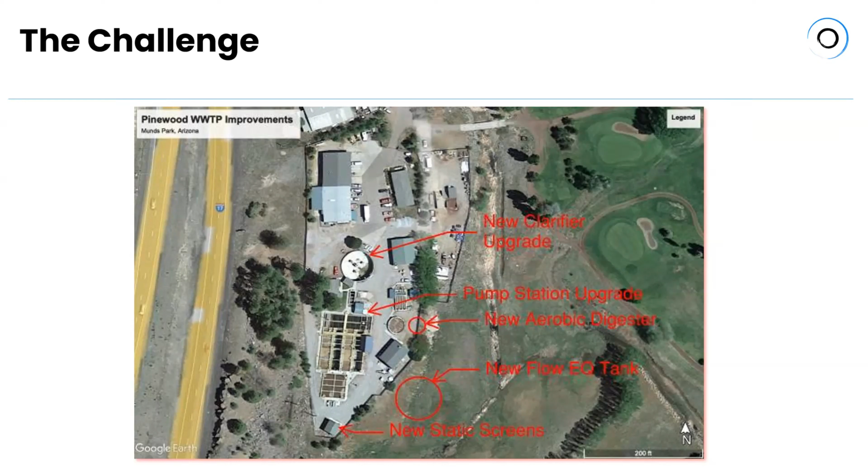So this is basically what I just told you. I talked about the I&I issues and the NPDES permit violation. Since we had an existing plant and it's already permitted for 600,000, we took that information and we put it into the Transcend software. And we also ran process runs for the existing 250,000 gallons a day average daily flow and we ran a process calculation for the 1.2 million gallons of the I&I flow.

And it was quickly determined that none of the process units in the plant were able to handle the high I&I flow value. We were able to confirm the sizing of the 600,000 gallon a day process for the aeration basins and the clarifiers. And that's when we saw the indication on the aerobic digester, and so that was a driver for upsizing that. So the Transcend software indicated a problem in some of the original plant construction. We needed to resize that, but all the other things that were in the plant were sized: bioselector, clarifier.

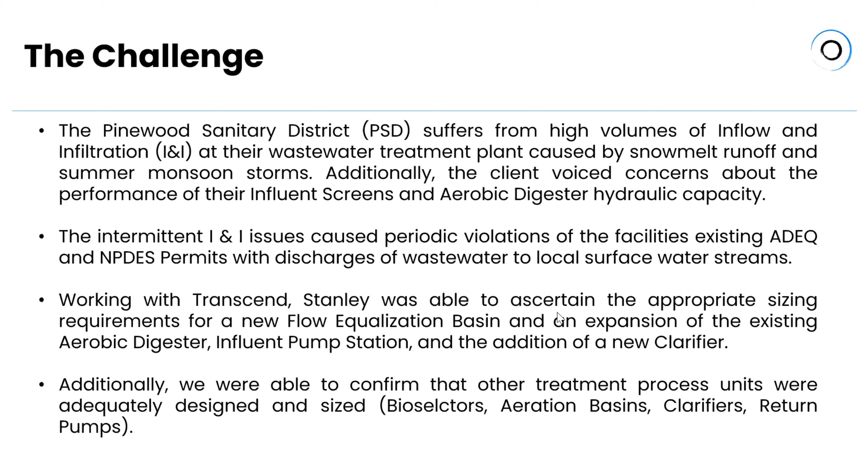So here I talked about the 3 runs. We did the 250,000 gallons a day, the 600,000 gallon a day current permitted plant capacity, and the 1.2 million gallons a day high I&I. We have to meet the current capacity to stay within state regulatory requirements. And because the plant can't handle the 1.2 million gallons a day, we have violations. And this particular plant has had so many violations that they're actually in consent order with the state.

And the consent order says you must stop the high flow, must get back within permitted plant capacity and take care of this. And that's why we've been actively involved with the state. We've showed them the process calculations we've generated from Transcend. We've talked about our option of the flow equalization basin, and certain regulators say, well, the problem's not at the plant, the problem's in the collection system.

Well, we recognize that, but the collection system problems are going to take 5 to 10 years to correct. And the treatment plant issue we could take care of in about a year or maybe 2 years. Obviously, we could build an above ground 1.2 million gallon flow equalization basin in less than a 1 year time frame, and that automatically stops the high I&I that slams the plant and causes these discharges.

So we're currently still working with the client to get some federal funding to help make all this happen. We're working closely with the state of Arizona to ensure that they're satisfied, and we're continuing an ongoing long-term master plan for the collection system. Ultimately, 5 years from now, all this should go away. The client will be back meeting regulatory and everything.

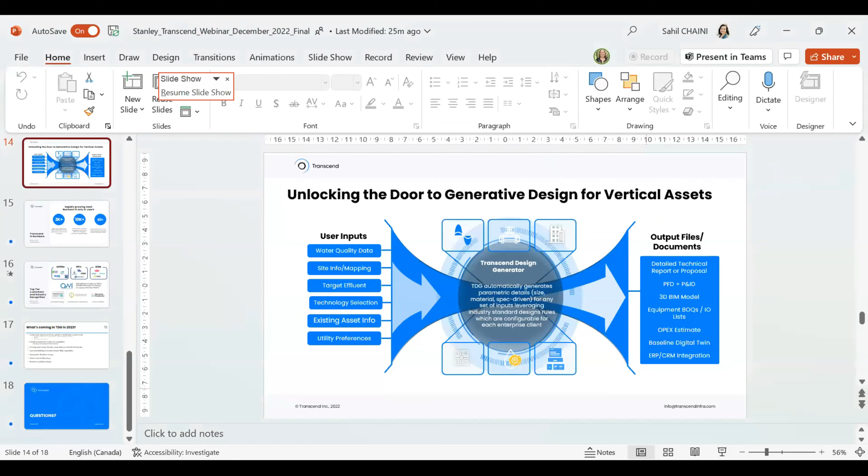So the question, Dave, is that it sounds like the conceptual designs at the plant and the design generator have contributed to a somewhat iterative approach to the I&I investigations in the collection system. Has the software helped you steer towards any other decisions or considerations in the collection system as well as the plant? Basically, what I think we get out of this is in identifying the plant problems, we're able to work with the client and see what the client can actually afford to repair. And so we were able to modify the master plan for the plant a little bit better to give them what they could afford.

The software really is more for wastewater treatment and not so much for the upstream collection system. But having the treatment plant information allowed us the opportunity to work with the regulators. Even though they're kind of bringing the hammer down hard on us with a consent order, saying you need to fix your collection system, and they keep reiterating that, we have to push back a little bit and say, yes, we recognize that, but that's a multi-year process and we can't get out of a consent order just like that unless we do the treatment.

And so by running the software, we're able to demonstrate that pretty clearly to the regulator, and they've kind of come around and they see where we're at. From all that, we took it back and we actually created a 5-year master plan and CIP for the entire system. I hope that helps answer your question.

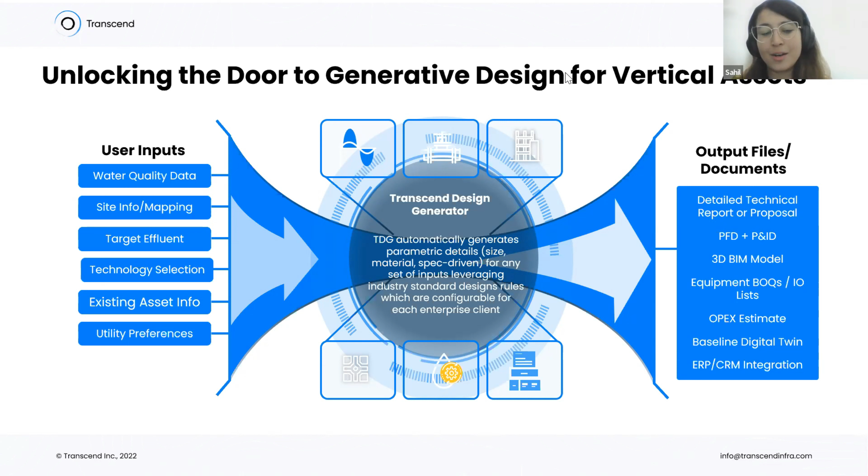I'm not sure how I can share my screen. If not, I can also bring up some examples, no problem. Yeah, why don't you bring up some examples? Give me a second. While you're doing that, I can talk about some of the other questions here.

Yeah, for sure. So I think Gina asked a question here about, can you set up limits parameters for the funding available cost design? I think Sahil maybe already answered that. You know, as well as I do, Gina, that clients have limited funds. So the way you would approach this, if you have an idea of what your client's funding is, go ahead and run the process calculations, determine all the treatment process units that need to be resized or upgraded, and then work with the client on the priority ones, the ones that they can actually perform with the funding that they have.

But the nice thing is the software actually will size everything, and you can see what your existing plant is capable of doing or not, and then you can focus on more specific individual processes. That's what I did with Pinewood. We knew the plant could do 600,000 a day. Oh, but the aerobic digester couldn't. And so that real fast became one of the elements that needed to be taken care of. So by running the software, you can get all existing problems.

Again, Gina, you asked a question, does Stanley typically use these for schematic level and then bring the rest of the design forward in-house, or does Transcend offer additional support after the initial design? Yes, the software and the output results we get initially are probably on a level of about 20 to 25%. That's real good if you're proposing on a wastewater treatment plant, put this kind of documentation in with your proposal. It shows that you've done your homework and you're able to present something to the client to hopefully capture the project.

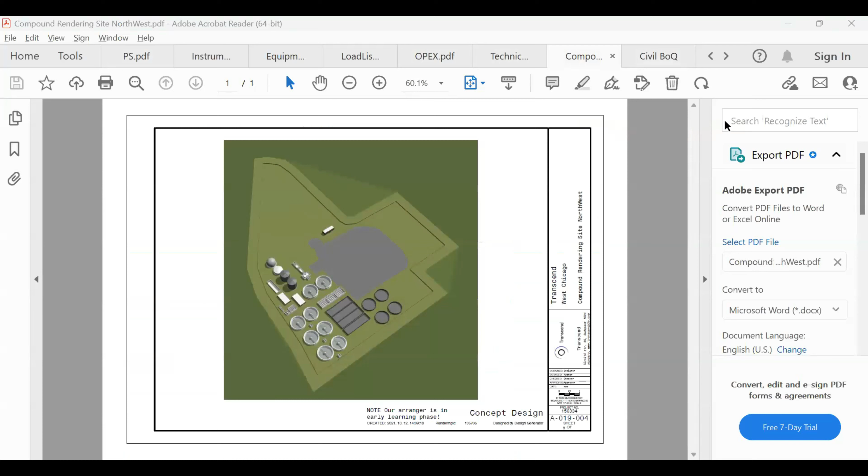So yeah, it initially does it at a schematic level, and then ultimately Transcend will refine the software to be more of a full-blown process software, but we actually go on and use some other spreadsheets to do final calculations. Do you have a rep for each project that you use to answer questions all through tech? I think that's going to be a question for Sahil.

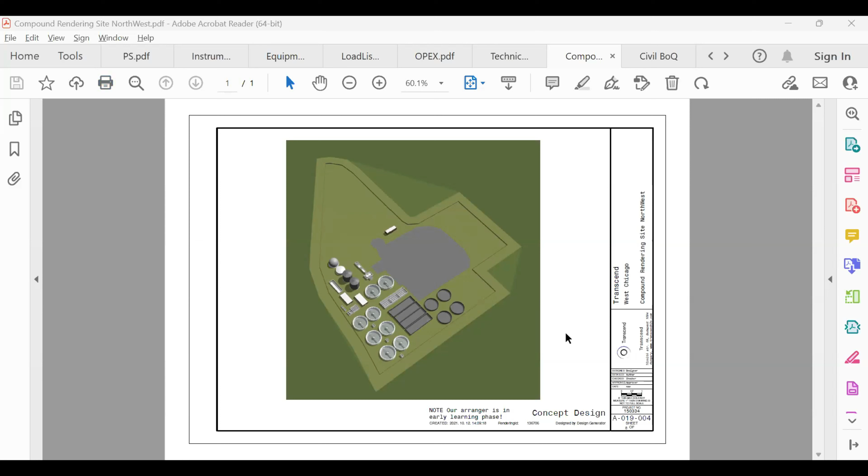How do regulators respond to the use of software in lieu of traditional design practices? In Arizona, most of the work that's done here is all run through different types of software like BioWin anyway. So they're pretty forward thinking here. Seeing output results and calculations and all the stuff we get in the Transcend data output, we don't have any trouble with regulators here. I don't know if other states are stringent. Again, that might be a question for Transcend. I think that's all the questions. Back up to Gina's first one about what a Transcend output looks like, and now it's going to go back to Sahil because you've got that up on the screen.

Absolutely. I'm showing a sample here that we ran in our demo instance. What you're seeing is a rendering. We do use Revit, which is an Autodesk product. You may have seen that we have a partnership with Autodesk. The way it works is, as you saw from Dave's drawing of the plant, new aerobic digester. What he did in Transcend was drew that site within Transcend using Google Maps exactly how you saw it. And you can essentially mark out, don't want anything to be built here, I want the biological area to be in this area. So this big gray area you see here is a no build zone. There's utilities or buildings there that the client didn't want to remove.

This is an MBBR facility. But I just want to show you'll be able to see everything in gray is the existing plant, and everything in white, or the lighter color, is new capacity that is required. So as Dave mentioned, you put in your input, the effluent quality and your influent flow, and then the software will say, this is what you have coming in, this is what you need coming out, here's the size of facility that you need. That's what Dave was talking about in terms of the sizing of all the different pieces of the plant, end to end.

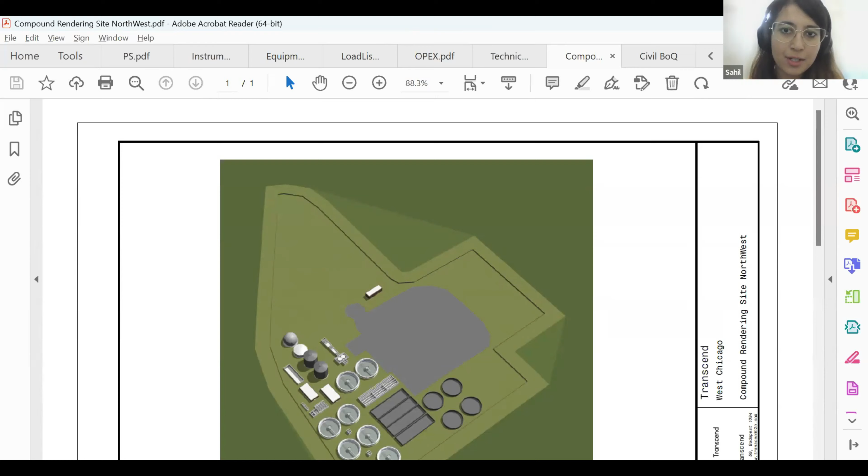And he also mentioned all the other types of documents. The process scheme, I know, is a big one for process engineers. So you'll actually see in here all the different portions of the process scheme and all the different parts of the facility. We have the equipment list, which gives you an idea of all the different equipment that's required for that facility, new equipment. So it'll tell you how much new equipment you need.

And then based on that equipment, we have a load list that'll be able to tell you the electrical load for, oh, sorry, that's going too fast, electrical load for that facility. We also have an OpEx document. So this gives you an idea of overall cost to operate the facility. So in terms of your costing, Gina, you have the numbers, and then you'd be able to say, okay, what is electricity cost in this specific area, and be able to do that analysis. So we do provide an overview of the chemicals, the polymers, and the waste for that plant as a whole.

The technical description is the key process document. So it really goes through the entire plant and describes every single part of the facility, and gives you all the process variables that you would need to put in your report. So for example, you would have a design basis, so all the influent and effluent characteristics that you would input. And then you would have here the coarse screens, fine screens, you would have the grit removal, primary clarifiers.

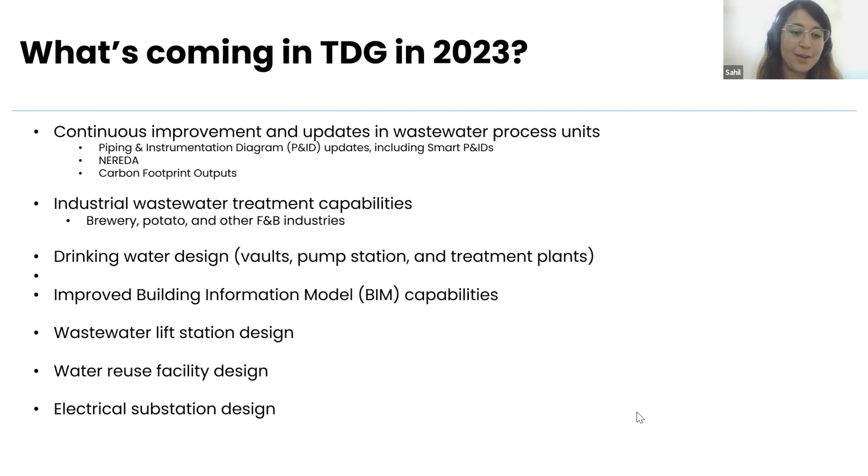And this is the one that I know is close to Dave's heart, the wastewater lift station. That's one of the things that we've heard a lot about, helping with the collection and distribution. So working on that, and then also reuse facilities. And if you all follow us on LinkedIn, you probably also see that we have electrical substation design as well.